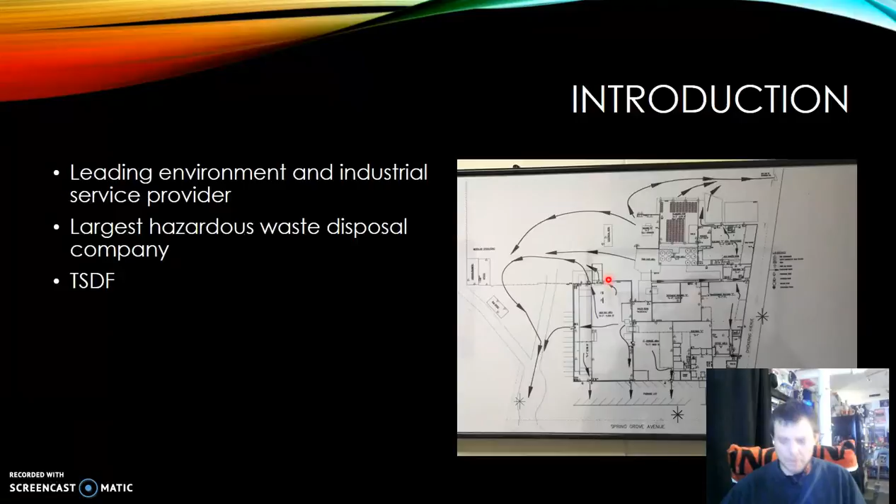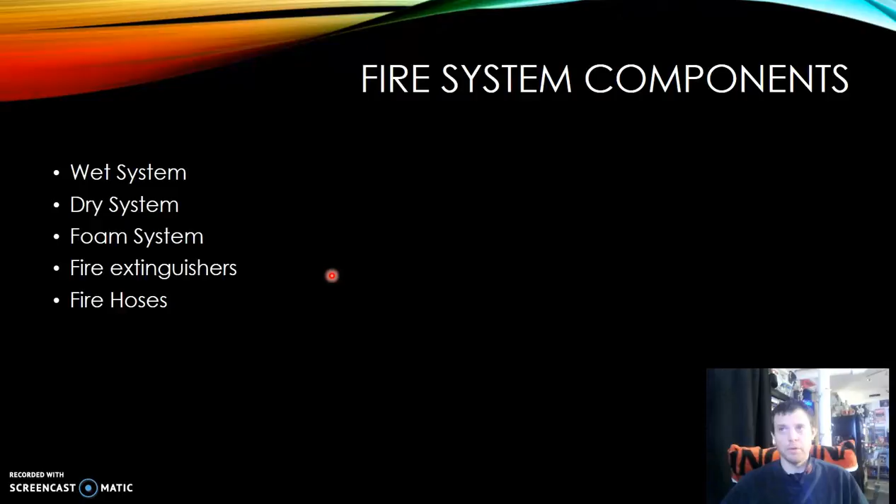There are several systems that make up the total fire suppression system at Clean Harbors. There is a wet system, a dry system, a CO2 system, a foam system, a dry chemical system, fire extinguishers, and fire hoses, as well as some other components.

Cintas does all the service on all the fire protection equipment in our plant. It was last serviced just last month, so it's up to date. It's good to go. These risers are capable of...

running 40 sprinkler heads and discharging a density of 0.30 gallons per minute per square foot over a maximum floor area of 3,000 square feet, operating at a PSI of approximately 69.3.

This system is up in the front of the facility. It protects over the main storage facility, as well as the foam system that goes with this system protects over the main storage facility, as well as the wastewater facility and some other facilities near the front of the building.

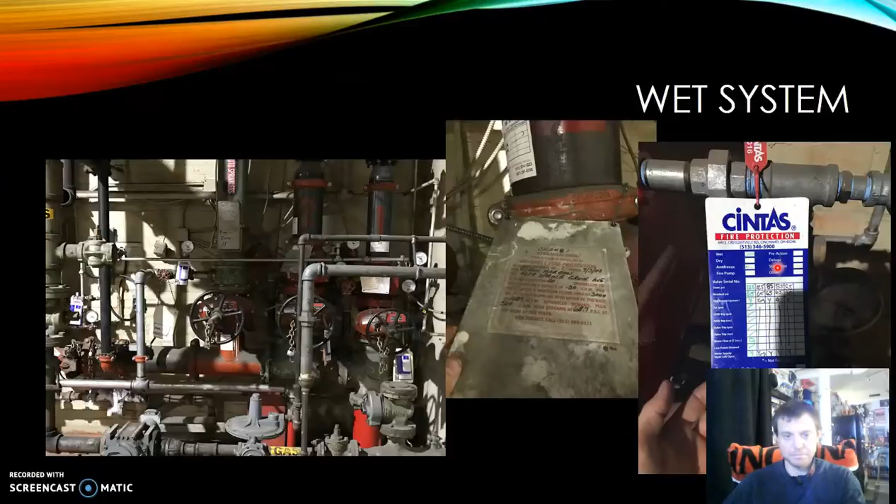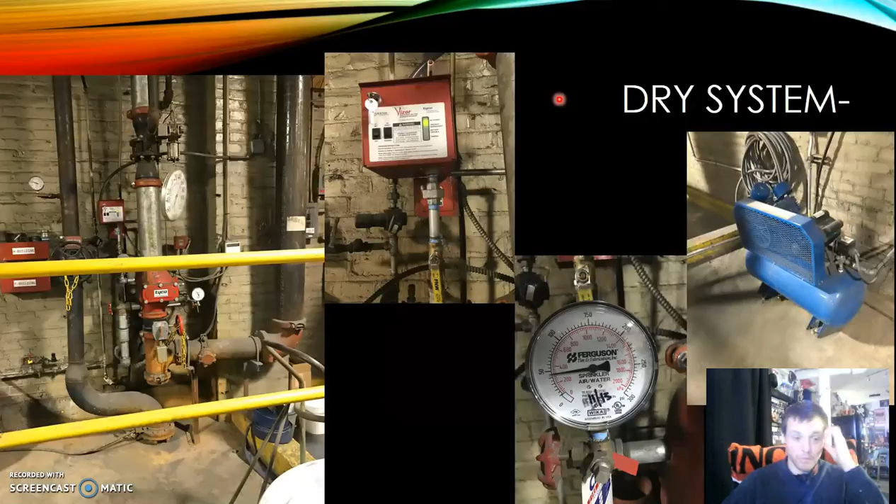So this system was put in order to prevent the freezing of the pipes. You can see over here it runs a compressor, runs on a compressor air. Here's one of the PSI gauges. Here's the riser itself, which offshoots over here and is part of the foam system as well. The water pushes through, the foam will connect to this as well.

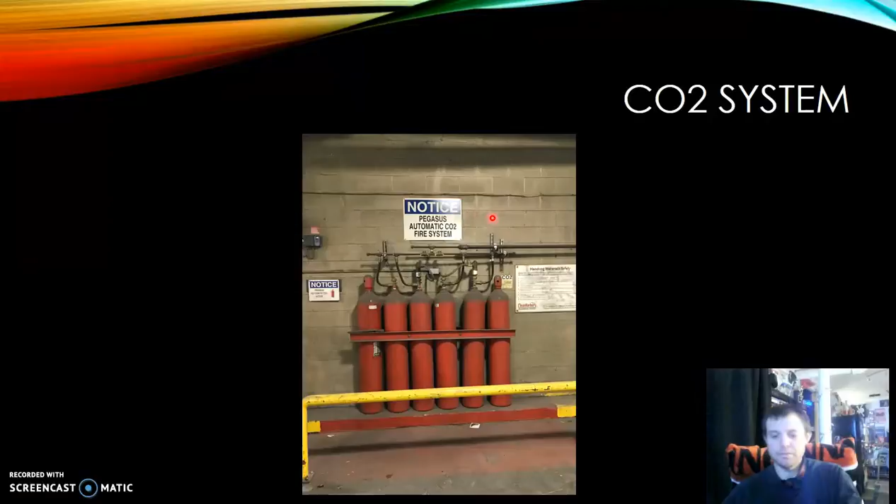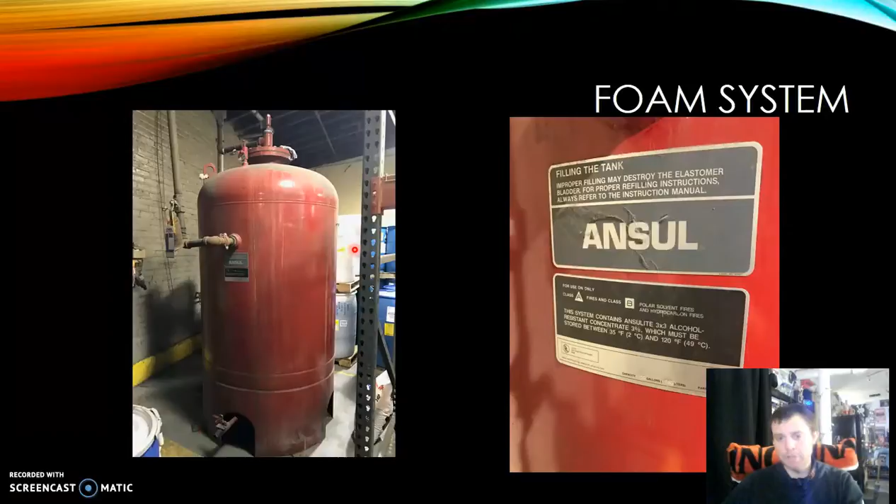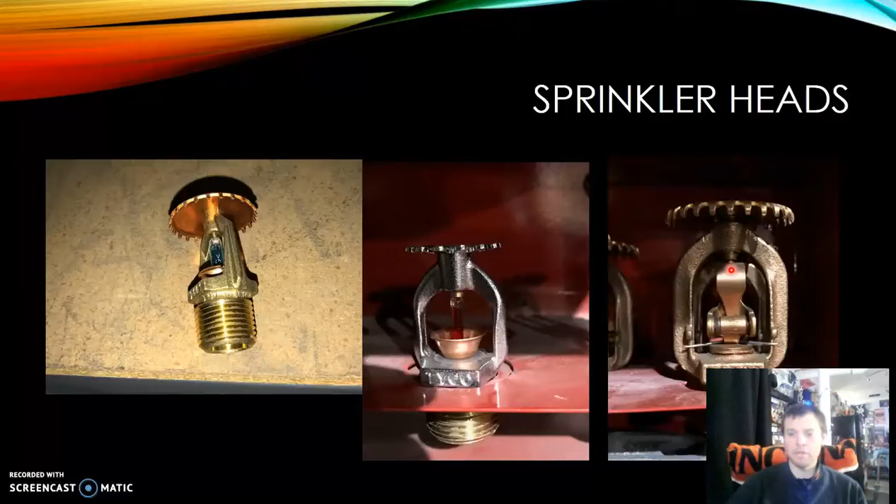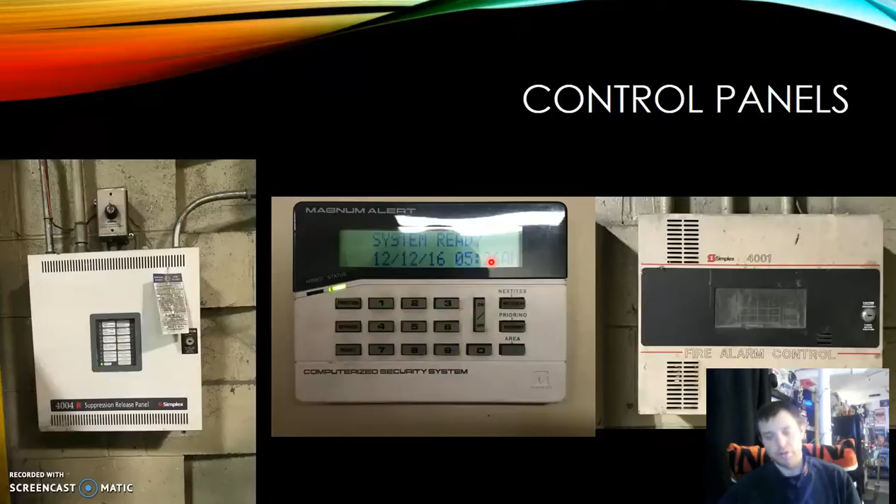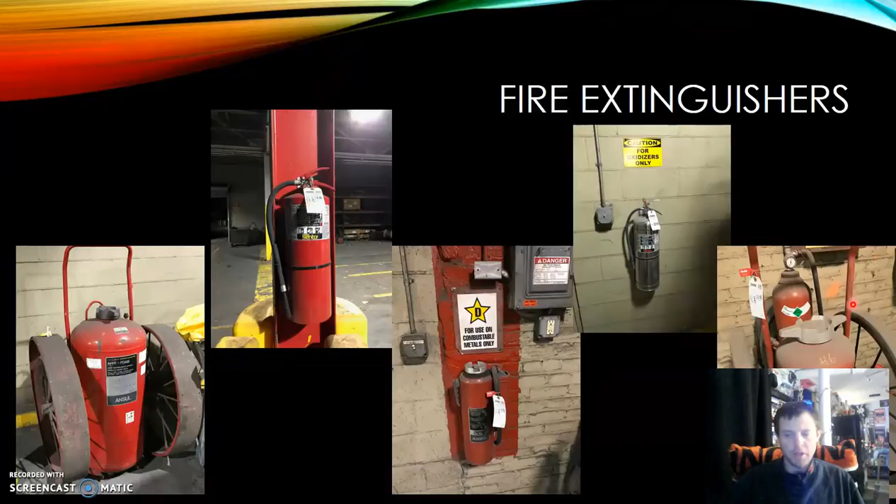And this is a dry chemical extinguisher. There are 2 of these located, one in each of the main buildings.

For the employees to assist with small fires, there's a fire hose and several fire extinguishers located out in this building. This is the only major equipment left on site. Most of what is done is driving of forklifts and moving hazardous waste on and off of trucks.

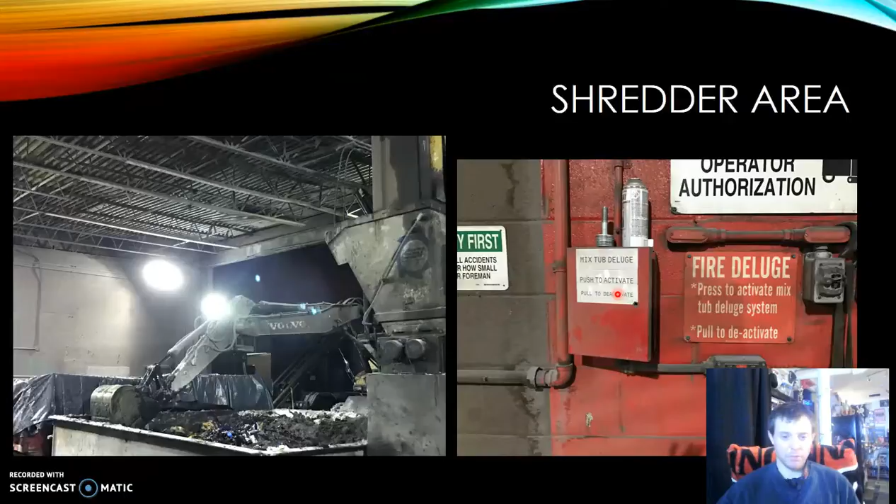There are only a few of these: one by two of the fire exits and two in the middle of the plant that I saw, and a few in the office area.

The exit doors, you can't see it because it's on the other side, are equipped with emergency exit alarms that are supposed to trigger the fire alarm, but they have been disconnected.

This is not like the one in the shredder building, this is a different one. These, when activated, will automatically dispatch the fire department that there is a problem.

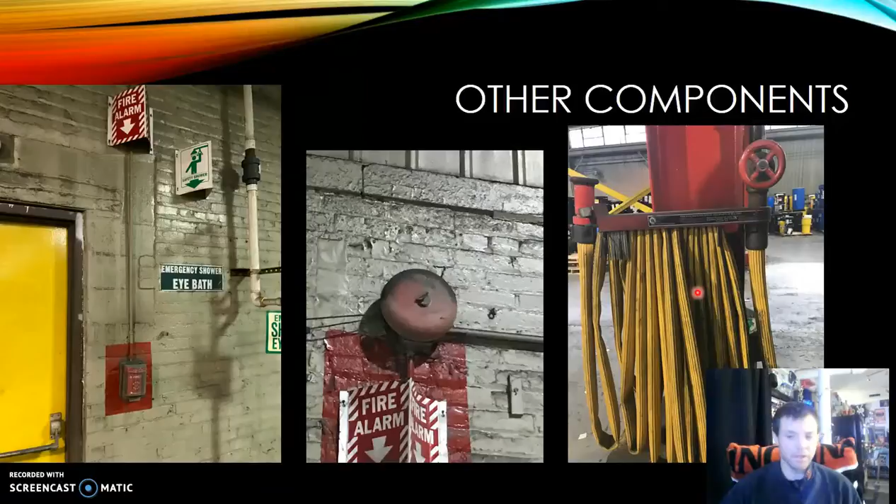Not pictured here, we have automatic fire doors. The fire doors, when there's a fire in an area, will be automatically closed to restrict the fire to that area, as due to the nature of the waste, we would not want fires to spread to other areas, as some of it is more flammable than others. It's best to contain them.

So, a little bit more - after doing the inspection, we've noticed several things. First, there are very few pull handles. If someone needed to activate a fire system because the fire alarm did not go off, there are not a lot of places to do so.

The warning devices - there are only three warning bells. There are no flashing lights. There are no warning devices in the offices other than the alarm system itself will make a loud noise. So there's none of that. So that's one of our problems.

Another problem we have is employee training. Employees don't really know the fire systems in the building and what they do, and they barely know what to do in the case of an evacuation. They know the fire alarm goes off and we need to evacuate.

There's not a very good plan for evacuation. There's no training on the different systems that are used and how they work. There's training on fire extinguishers, but there's only training on the ABC fire extinguisher, not all the fire extinguishers.

So I think one of the things that needs to be done is we need to train our employees better on the systems, how they work, and how to operate the manual components of the system, like the fire extinguishers, the fire hoses, the deluge system, and different things of that nature, the different fire extinguishers.